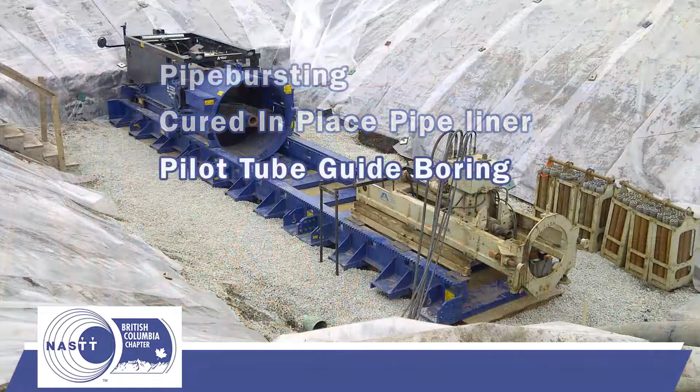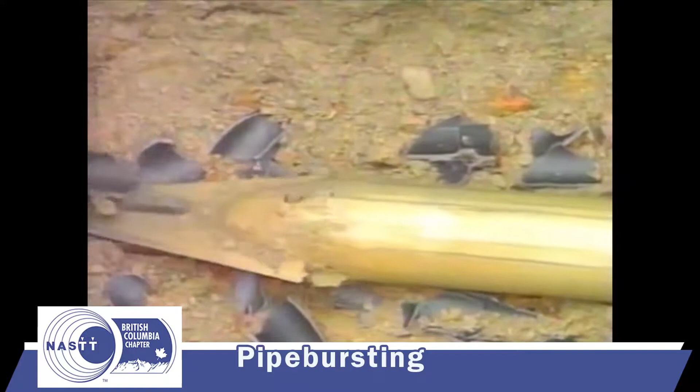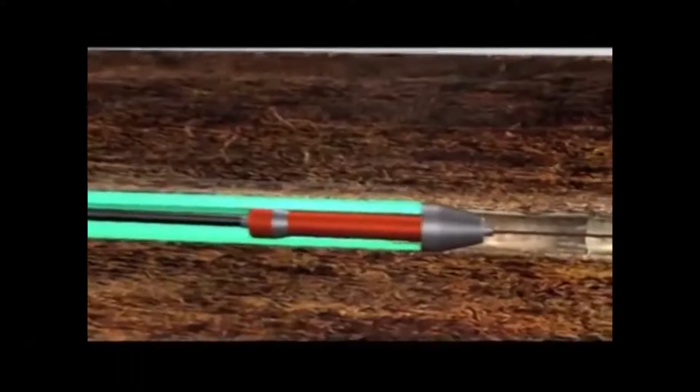There are two different pipe bursting methods, dynamic and static. When dynamic pipe bursting is being applied, a pneumatic hammer or ramming machine is propelled through the old pipe with the assistance of a winch which performs the actual pipe bursting operation, whilst simultaneously pulling in the new pipe. Size for size, or upsizing of existing pipelines is also possible.

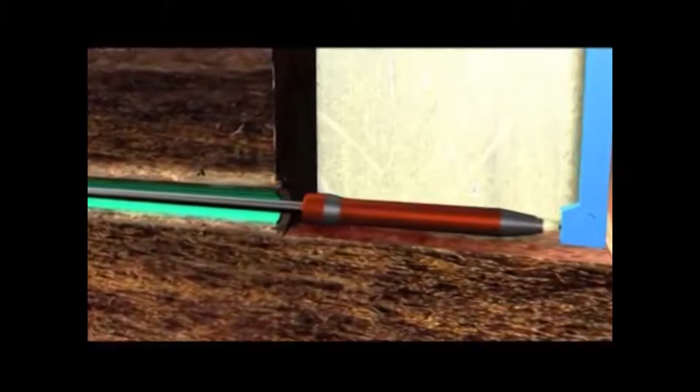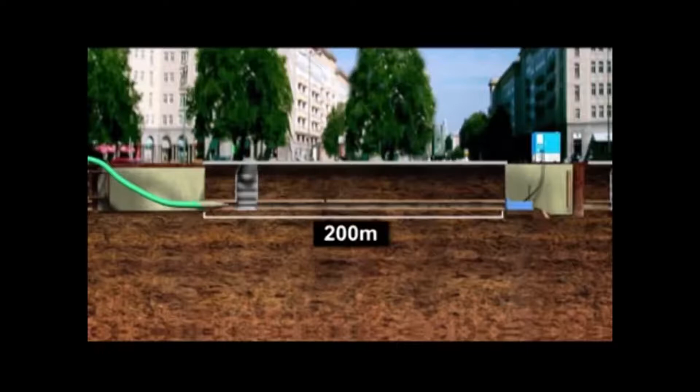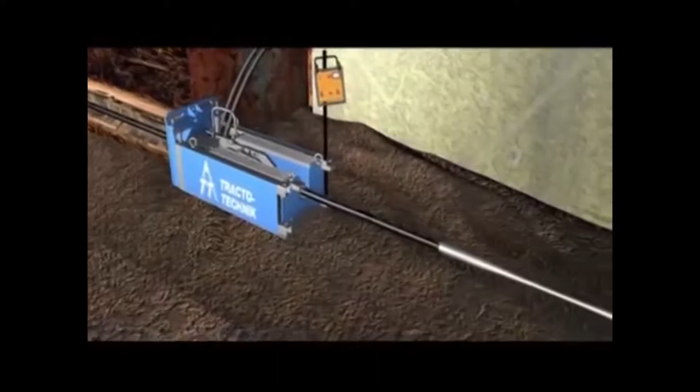A hydraulically driven static pipe bursting rig pushes the quick lock rods up to 200 meters into the internal line of the old pipe. On arrival in the target pit, the bursting tools with the new pipe are connected. While the rods are being pulled back in, the old pipe is fragmented and displaced, and a new pipe of equal or larger pipe diameter is pulled in at the same time.

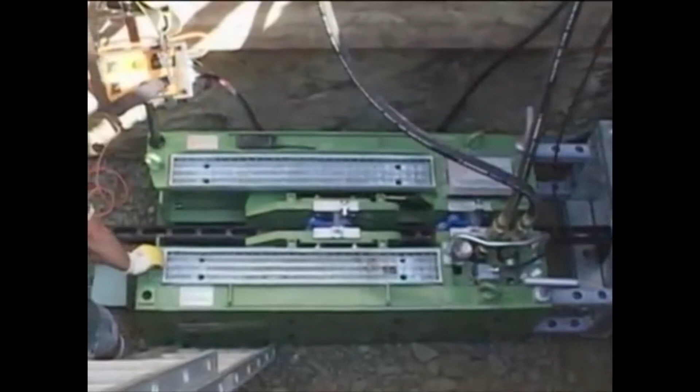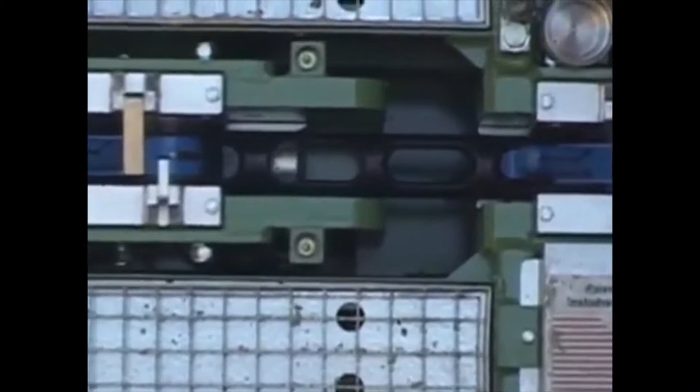Under favorable conditions, the rods can be pulled back through the rig and simultaneously pushed into the rear-facing mains, ready for the next bursting operation. A highly productive solution. The time needed for the rod string assembly and disassembly for an entire two-way mains replacement length is thus saved. House connections can be installed or replaced directly from out of the pit or the manhole to the interim pit without open trenches.

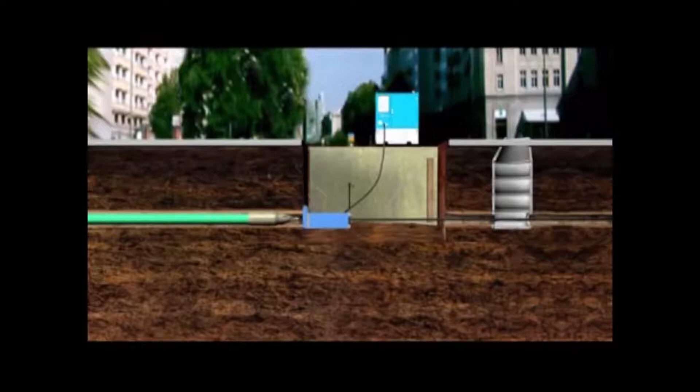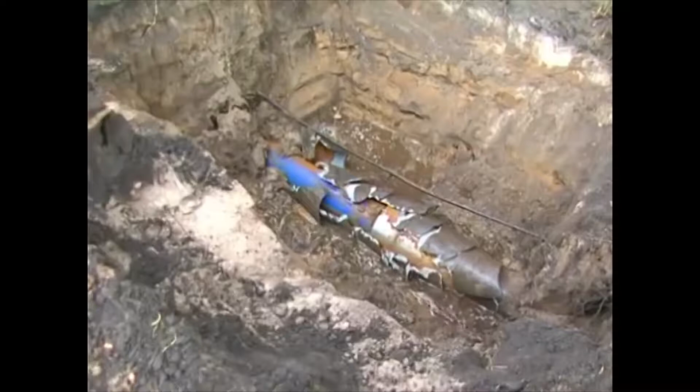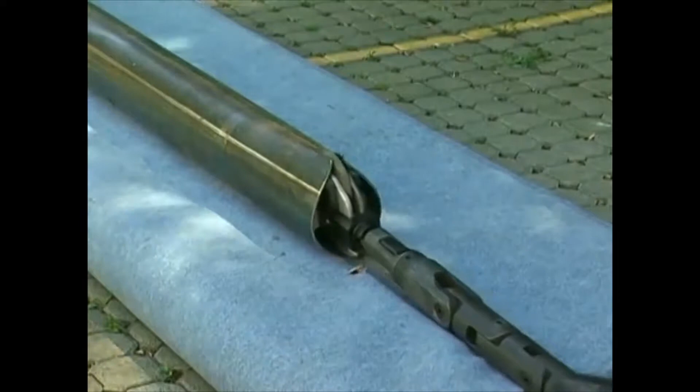Some sewer lines are made of brittle materials like vitrified clay, concrete or grey cast iron. In such cases, a bursting cone and sleeve is utilized, which shatters the defective pipe into small shards and displaces them into the surrounding soil. Materials which are hard to break, for example steel, ductile cast iron or plastic, are cut open with a cutting or roller blade and pushed apart.

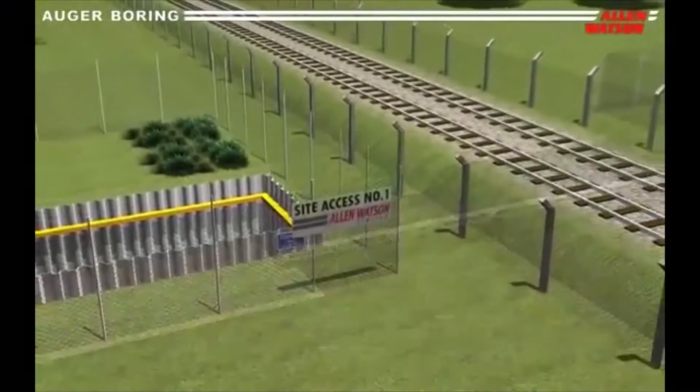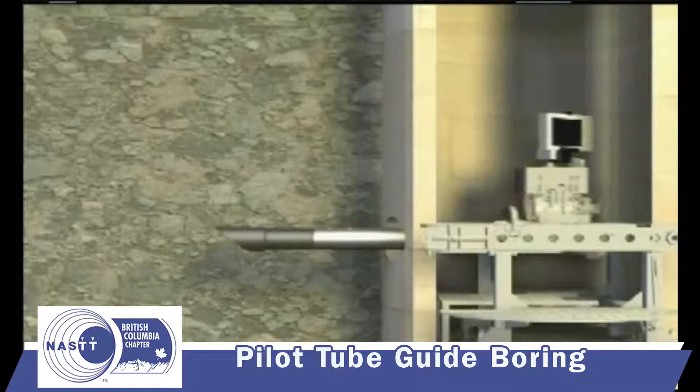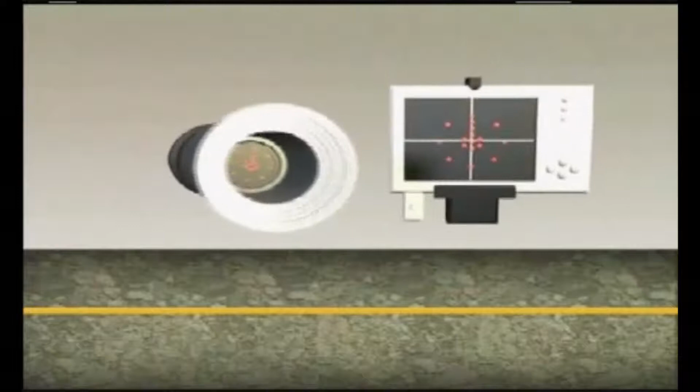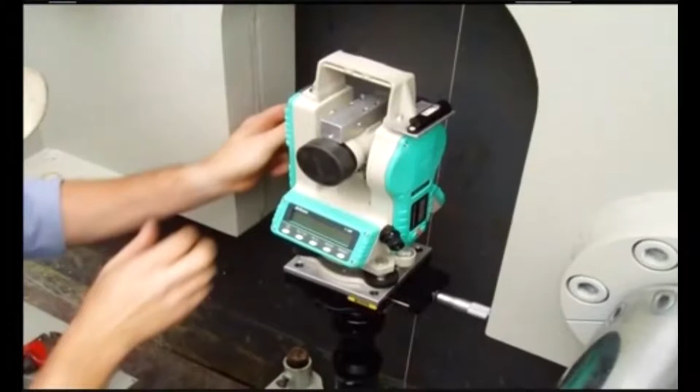Installation of the pilot tubes on line and grade. The 4-inch pilot tubes are pushed through the ground from the launch to the reception shaft. The leading end of the pilot tube is the angled tip steering head. This head holds the LED illuminated target that is visible through a theodolite, camera, and monitor. The theodolite and digital camera are set on the desired line and grade and positioned to view the target through the center of the pilot tube.

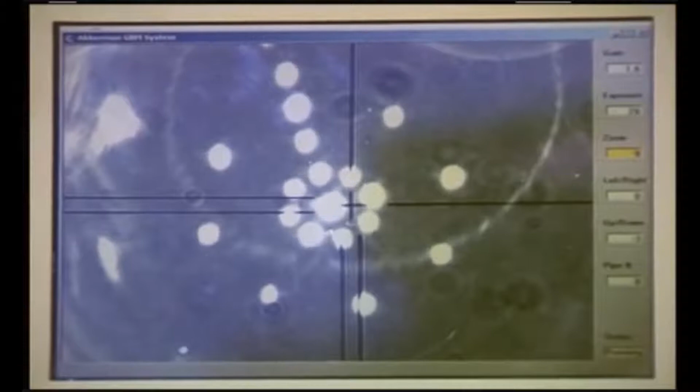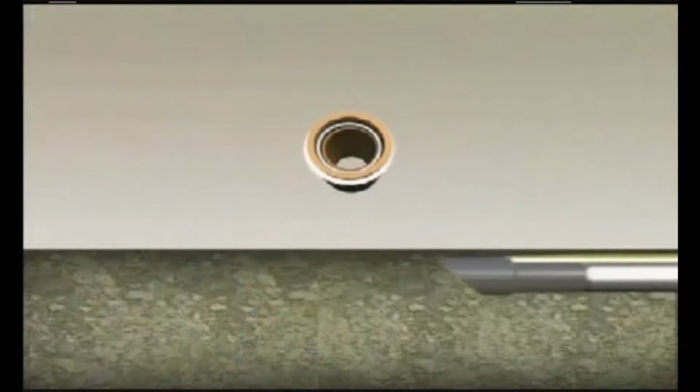The crosshairs of the theodolite are visible on the monitor along with the illuminated target. The operator rotates the steering head as needed to maintain the desired line and grade. By using a computer monitor and digital camera to view the output, the signal can be digitally enhanced, allowing for an extended run. This guidance system has ensured line and grade tolerance of 1/4 inch in distances exceeding 500 feet. The dual-walled pilot tubes provide a means to lubricate the outside of the tubes as they pass through the ground, which reduces the force required to thrust and rotate during installation.

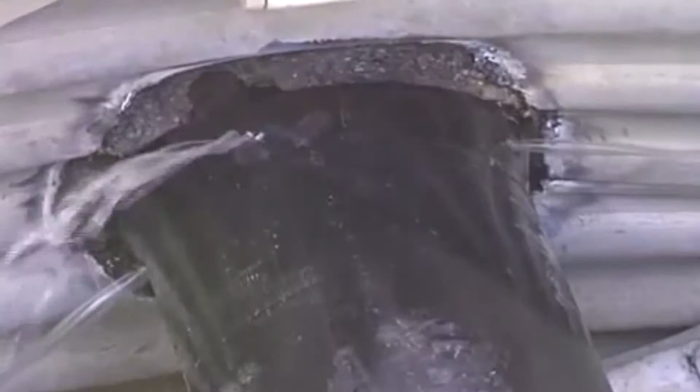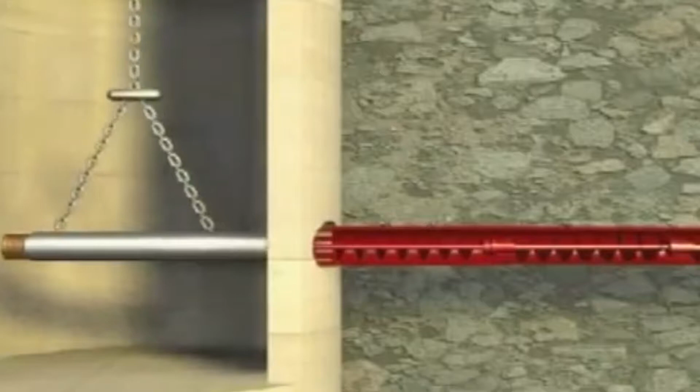Diameter by following the pilot tubes with a reaming head that matches the diameter of the final product pipe. The reaming head and temporary casings and augers are attached to the pilot tubes and advanced by the jacking frame. As the temporary casings advance, they push the pilot tubes into the reception shaft, where they are removed. Spoils are removed and transported by the augers back to the launch shaft and fall into a dirt bucket, which is emptied when full.

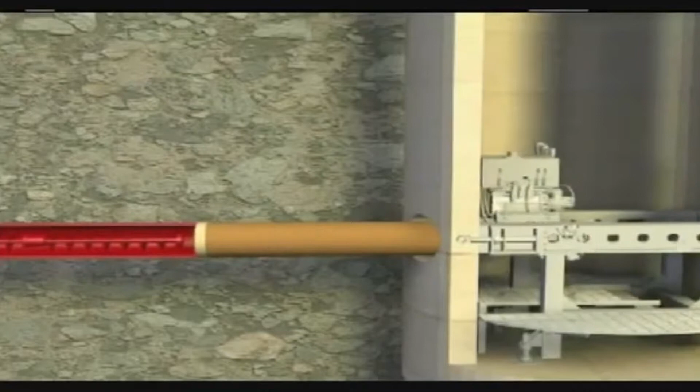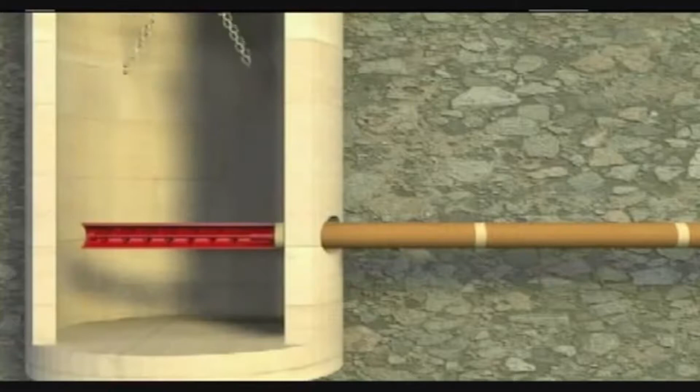Step 3 is the installation of the final product pipe. A pipe adapter is installed on the last section of the temporary casings and augers to match the final product pipe. Just as the temporary casings and augers replaced the pilot tubes at the receiving end, the final product pipe pushes the temporary casings and augers into the reception shaft where they are removed. The process is finished when the product pipe reaches the reception shaft.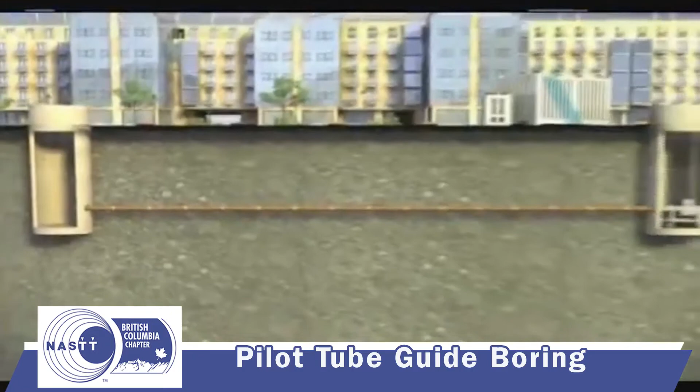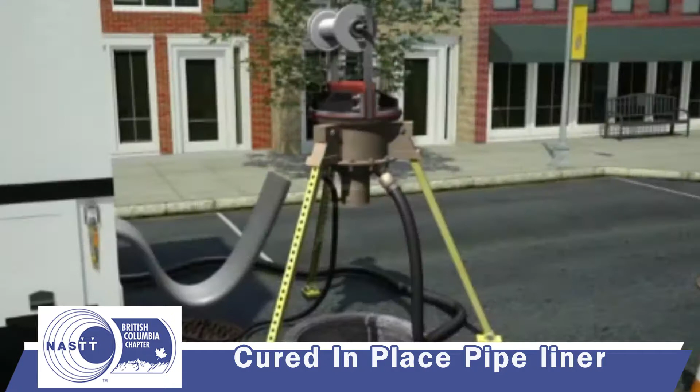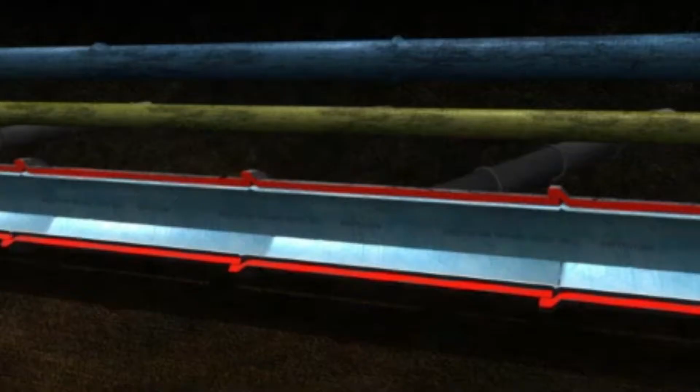CIPP is a pipe within a pipe, installed without digging. Resin-saturated, coated felt tubing is inverted or pulled into the existing pipe. Hot water or steam is then circulated throughout the tubing, curing the resin and forming a tight-fitting, jointless, corrosion-resistant pipe within a pipe. Service laterals are then restored using a robotically controlled cutting device.

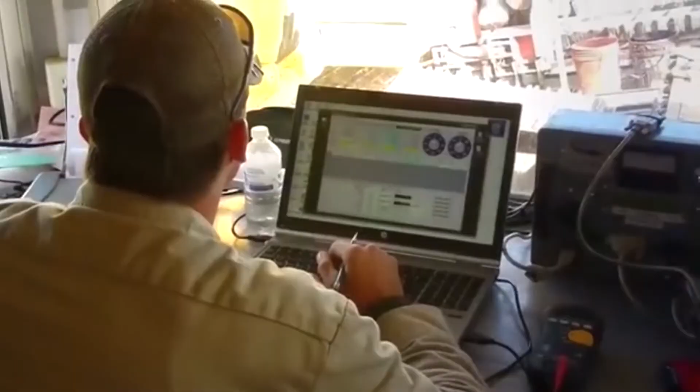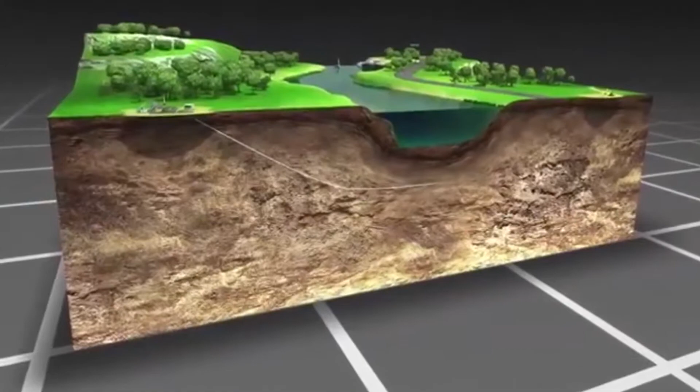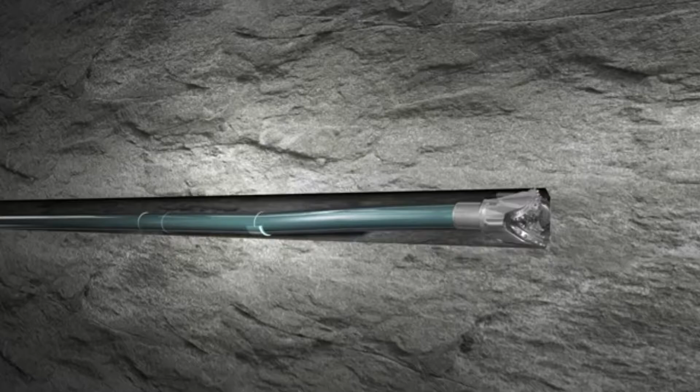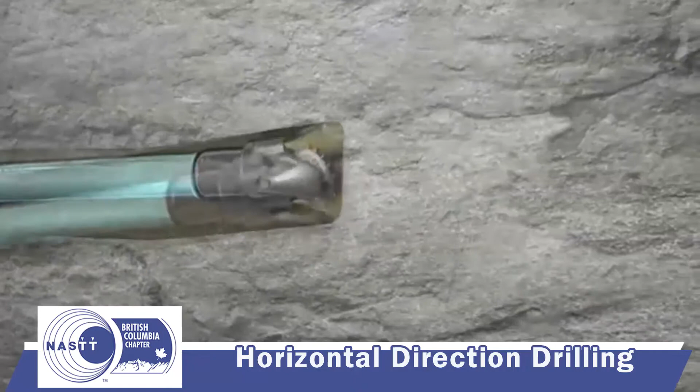A skilled driller can direct the course of the drill bit along a pre-planned path over great distances. Different formations, however, require different techniques. In alluvial or soft formations, a jetting assembly uses high-pressure fluid to remove formation while drilling. A drill motor replaces the jetting assembly. Now the hydraulic pressure is used to drive a turbine, which rotates the bit without having to rotate the drill string. This allows the driller to orient the bend and drill in the desired direction. The string is pushed forward or slid, guided by the deflection of the bend. Once this directional adjustment is complete, the drill string can again be rotated. At regular intervals, steering data is gathered and adjustments made.

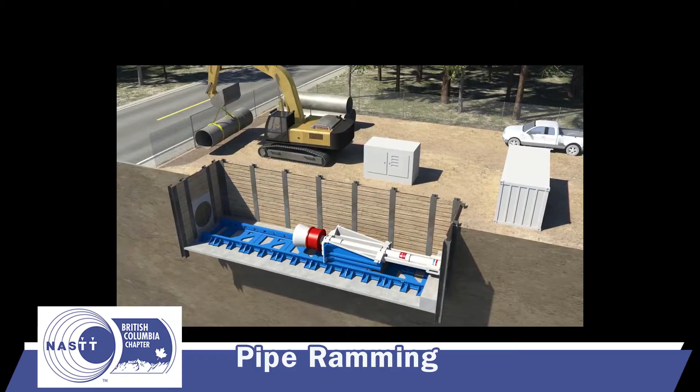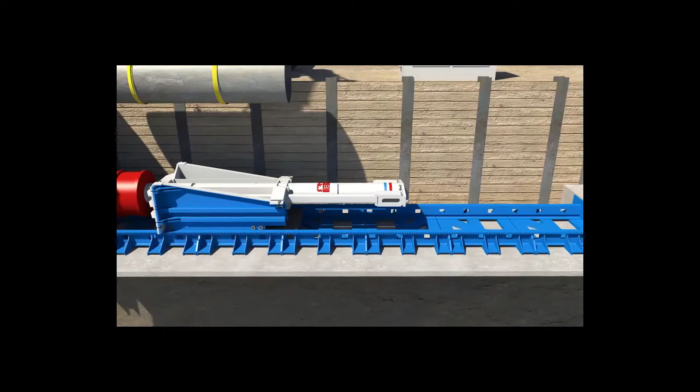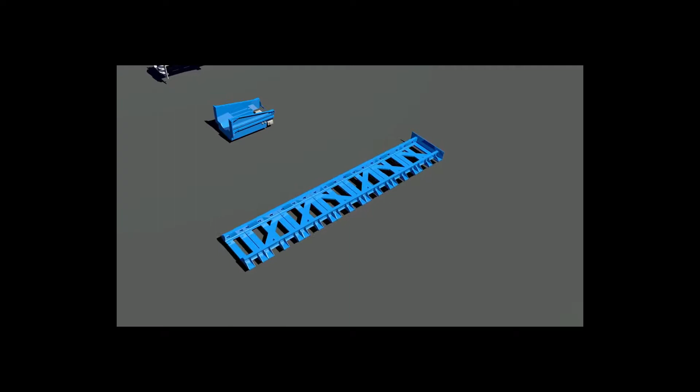For large-scale pipe ramming processes in gravelly, bouldery, or unstable ground conditions, we have developed this technology that is unmatched in efficiency of setup and installation, while also having the least impact in terms of noise pollution and effect on the overall environment. The hydro hammer setup consists of 5 primary pieces of equipment: rails for the system to travel on, hydraulic press, hammer support cradle, the IHC S90 hammer, and control shack.

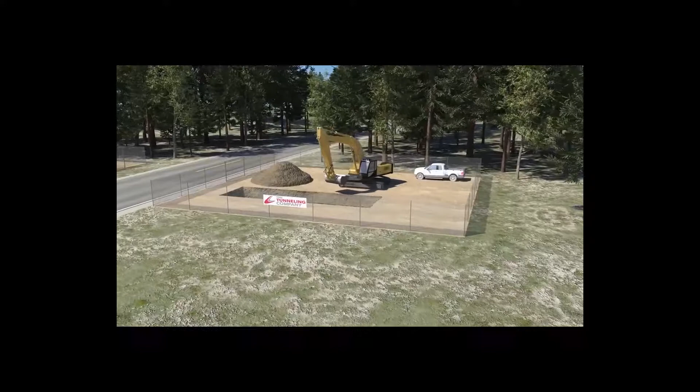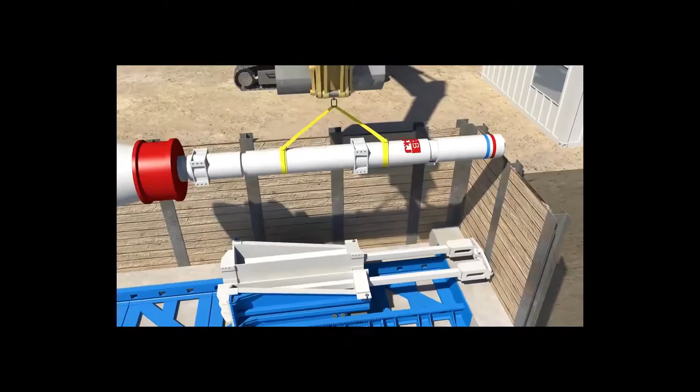The first step in the installation process is the construction of the bore pit. Next, the control shack is installed in an appropriate location. With the control shack in place, the hydraulic press assembly is mounted in the rails. Then the hammer support cradle is placed in the press assembly. Once the press and support cradle are installed, the hammer can be placed in the cradle. The final step is the connection of the hydraulic lines. Once the bore pit is constructed, the hydro hammer can be installed in a matter of a few hours.

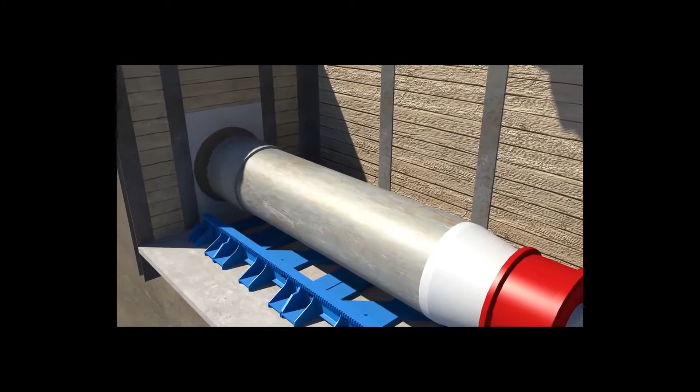With the hydro hammer setup complete, pipe installation can begin. The first piece of pipe, outfitted with the appropriate drive shoe, is placed on the rails. The hydro hammer is positioned and begins driving the pipe into the ground. The hammer strikes the pipe with ultra-high energy and is accelerated to tremendous velocities that shear the soil and eliminate skin friction resistance. This decreases soil setup time and allows the pipe to be driven more efficiently. And because soils enter the pipe as it is advanced, ground heaving or settling is minimized and loss of ground causing any voids is eliminated.

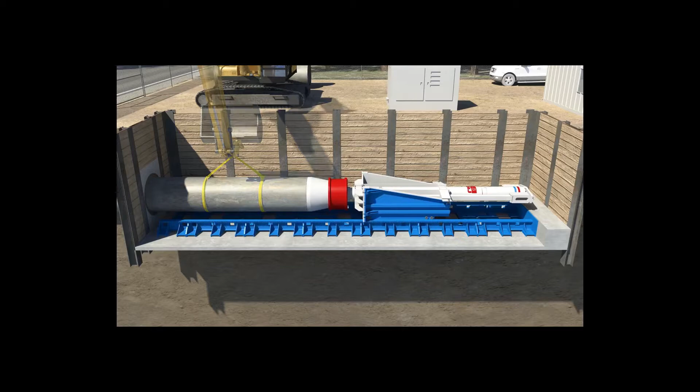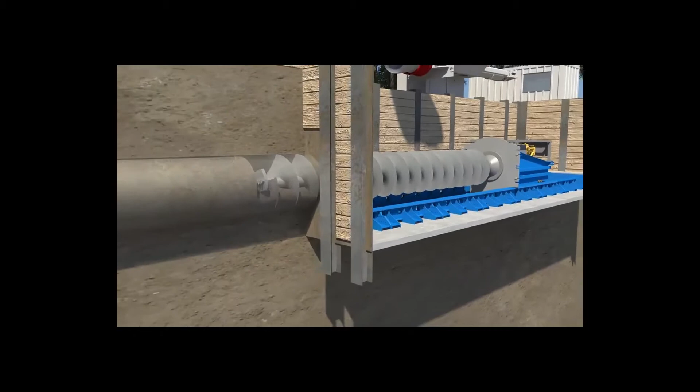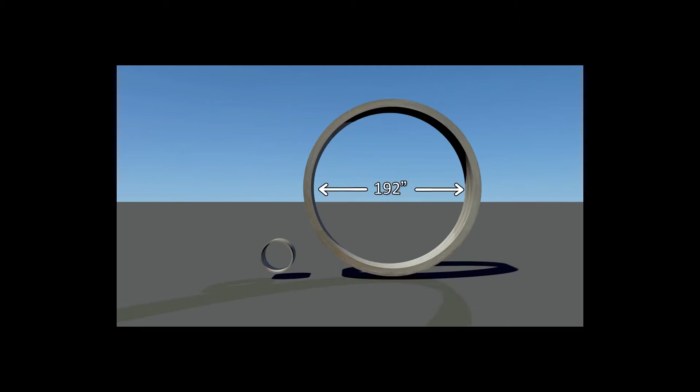Once the first piece is driven in, the hydro hammer is retracted, a second piece of pipe is lowered into place and welded. Then the hydro hammer is repositioned and the advancement process continues. This pattern is repeated until the steel casing is entirely in place and the crossing is complete. Next, the hydro hammer assembly is removed and the auger boring machine is placed on the existing rails. The auger rotates into the casing, cleaning out any material inside. Additional sections of auger are added until the entire casing is clean. All equipment is then loaded onto trucks and removed from the site. Currently, this process is suitable for projects involving the installation of steel casing from 36 to 192 inches in diameter with a single drive length of up to 200 meters.